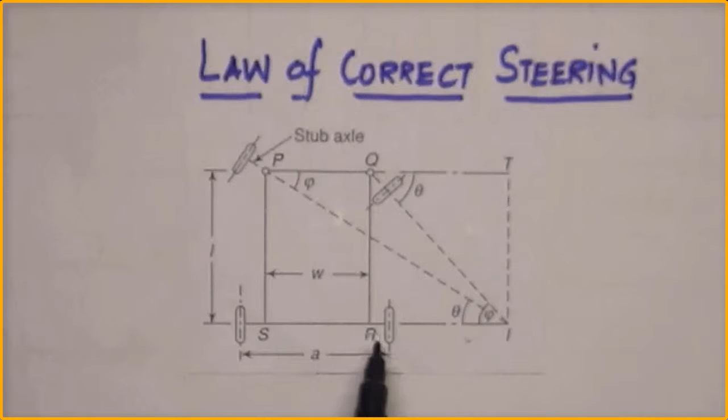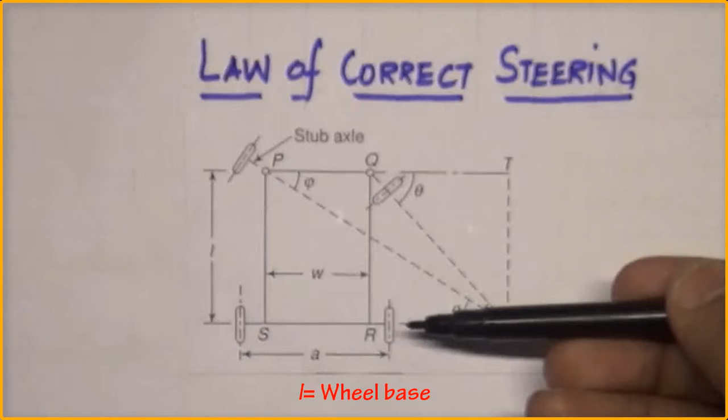Let's get used to the terminologies first. The distance between the two wheels, A, shown in the diagram, is called the width of the track. Similarly, the distance between the center of the rear wheel and the front wheel is denoted by the wheel base, which is L.

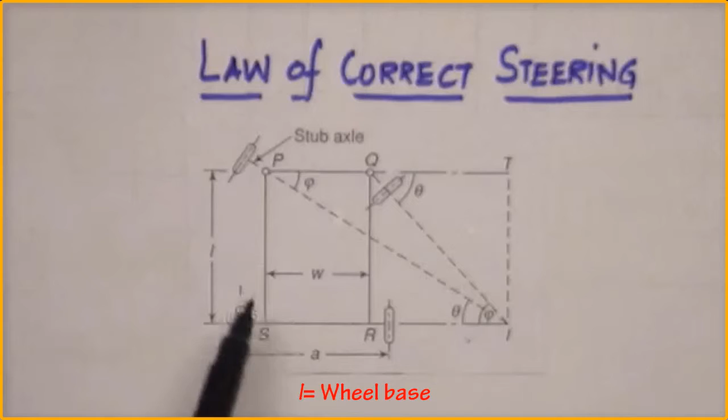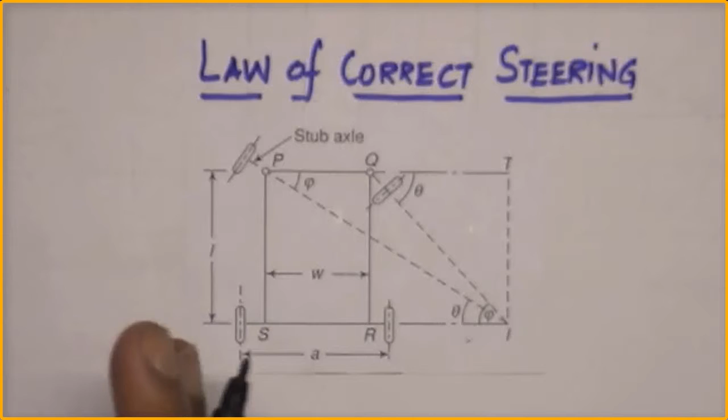Also, the actual width of the chassis is defined in this figure as W. Notice that width W of the chassis, A, the track width of the car, and L, the length of the chassis or the wheelbase, these are all constants. These are all fixed.

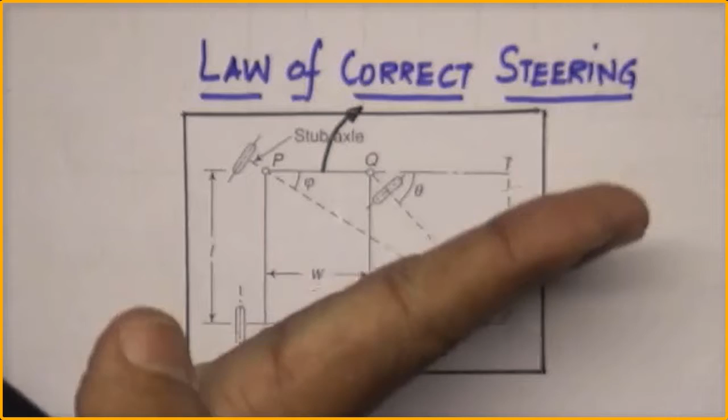Now, if while taking a turn, we want the vehicle to take a perfect right turn, in this case, which I would denote it this way. For the right turn, notice that the inner stub axle passing through Q and therefore the inner wheel will turn more at an angle theta with respect to the front axle PQ. At the same time, the outer wheel, which is P, connected by the stub axle passing through this wheel center, will rotate, but the angle of rotation phi will be slightly smaller than angle of rotation theta.

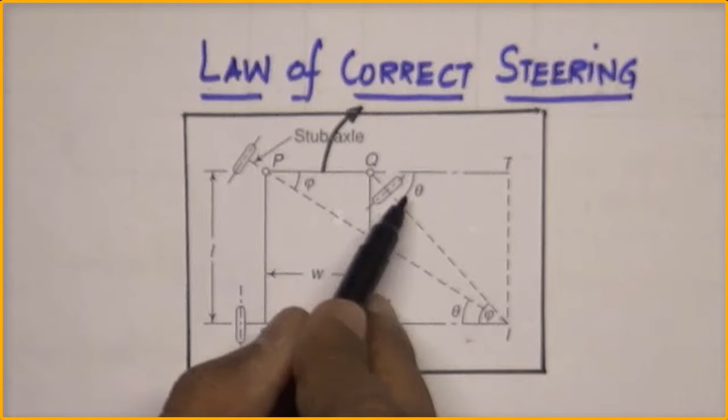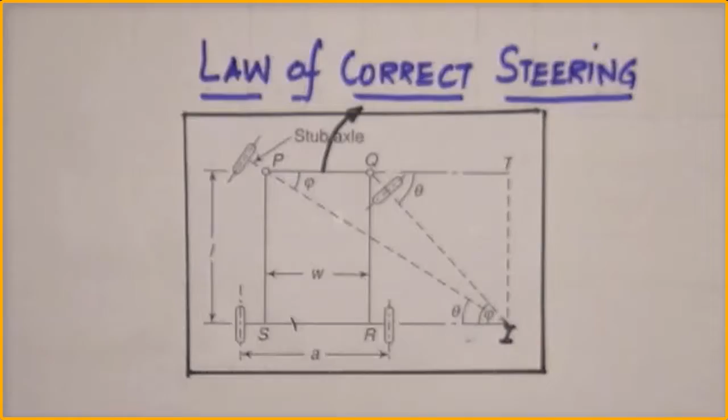Now, if you extend the lines passing through the two wheel centers, they will both intersect at this point, which we call the instantaneous center of rotation I. Also note that the instantaneous center lies on the line passing through the rear axle as seen previously. We are interested in getting a very simple relation between at what angle the inner wheel turned and at what angle the outer wheel turned.

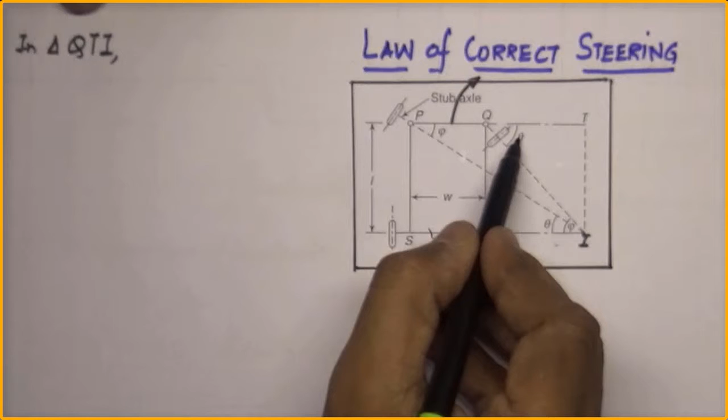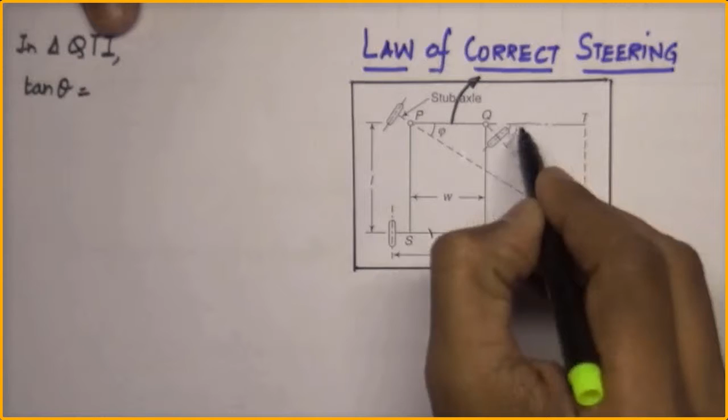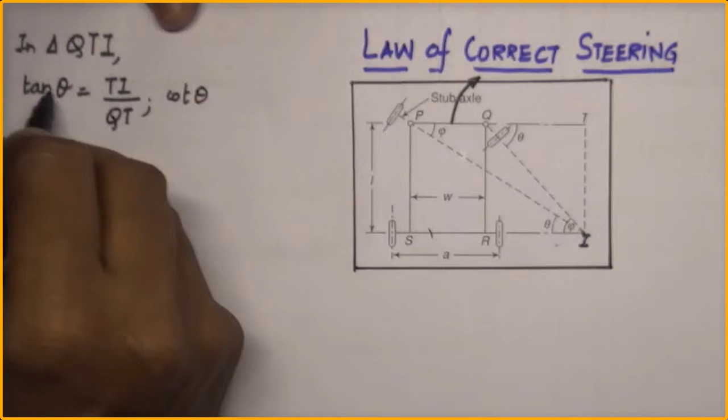Now, consider this right angle triangle ITQ. So in the triangle QTI, which is out here, we have an angle theta. If I consider tan of that angle theta, which is simply opposite side upon the adjacent side, we will get TI divided by QT. As far as the equation is concerned, it is actually easier if we rewrite this in a cot ratio rather than in the tan ratio. So therefore, the same tan theta, reciprocal of it, would look like QT divided by TI.

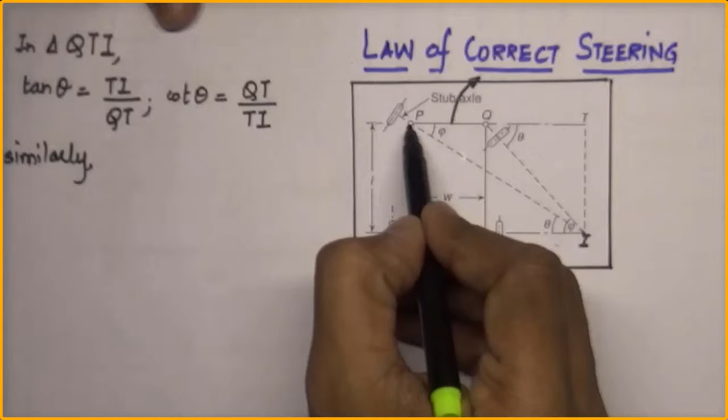Now, similarly, there's a bigger right angle triangle PTI, which involves the outer wheel. So in the triangle PTI, let's keep this separately. Again the same thing: if I consider tan of the angle phi here, it would be opposite side TI divided by the adjacent side PT. Same reasoning, if I consider the reciprocal of this, cot phi would look like PT divided by TI. Now, this is the geometry of your chassis or of the vehicle.

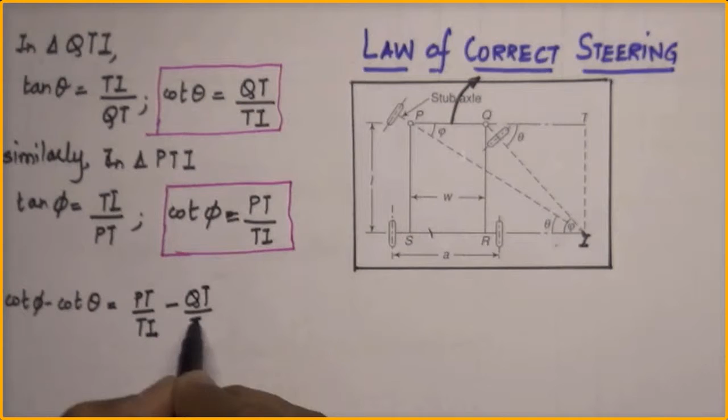Now, simply, randomly, consider the difference of cot phi and cot theta. Right now, you may not understand the reason why we have taken the difference, but if I subtract the left hand side from the right hand side, we get PT upon TI, the right hand side of cot phi, minus QT upon TI, the right hand side of cot theta. Now, the LCM of both these would be TI, and you would simply get PT minus QT.

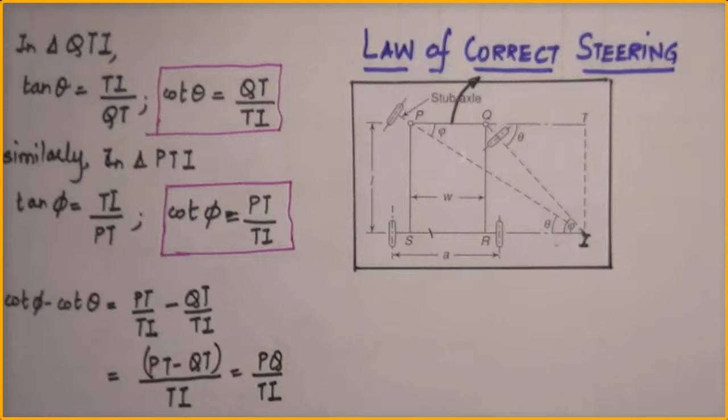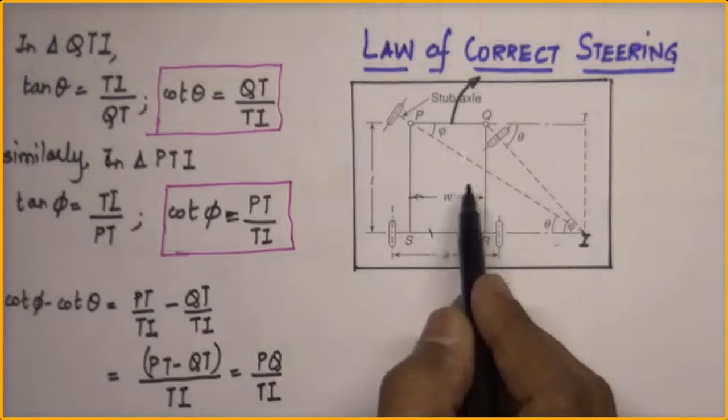Now, from the diagram, PT minus QT would leave you with only the chassis width W, that we can call PQ. The denominator TI, let us keep it as it is. So finally we get a ratio. Notice now that the chassis width PQ is fixed because the chassis is welded, so the numerator would be replaced by the chassis width W. Now the denominator TI, which we have made as an extension and a construction line here, would be exactly the same as either QR or the distance PS, which happens to be the distance between center to center when the vehicle is going straight. Now, this longitudinal distance is actually called the wheelbase, and the wheelbase is L.

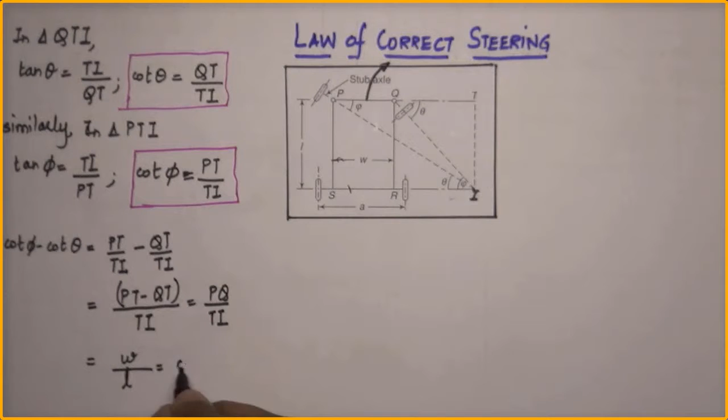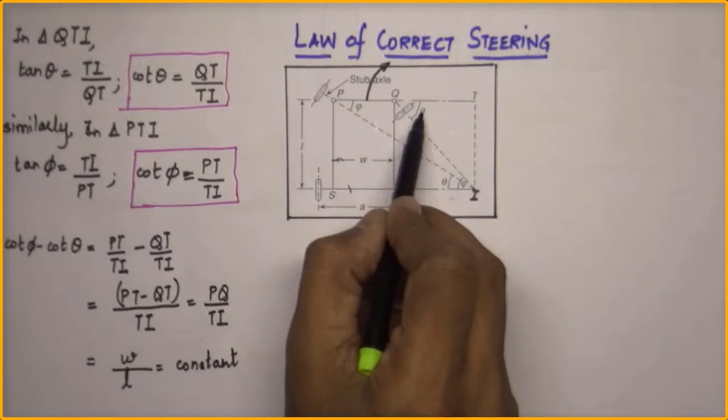Points to be noticed here: the width of the chassis and the wheelbase of a vehicle are all constant, and therefore we get a very nice relation between the angle turned by the outer wheel and the angle turned by the inner wheel, the ratio being cot phi minus cot theta equals W upon L. Notice here that the right hand side of this equation is a constant, and therefore the difference between the two is a non-zero number. This is very simple mathematics, and because the right hand side is non-zero, anybody can prove that these two are not equal to each other.

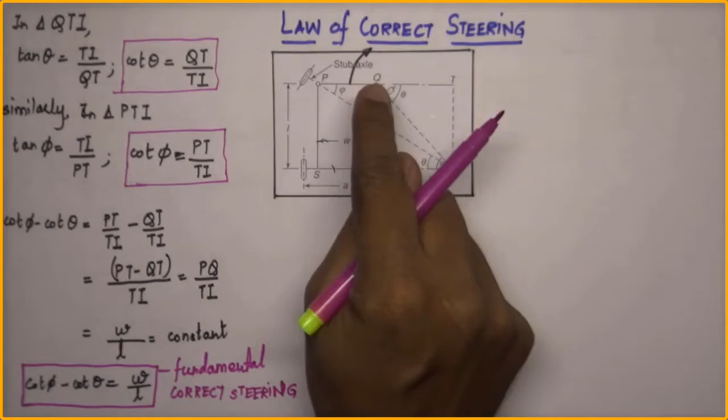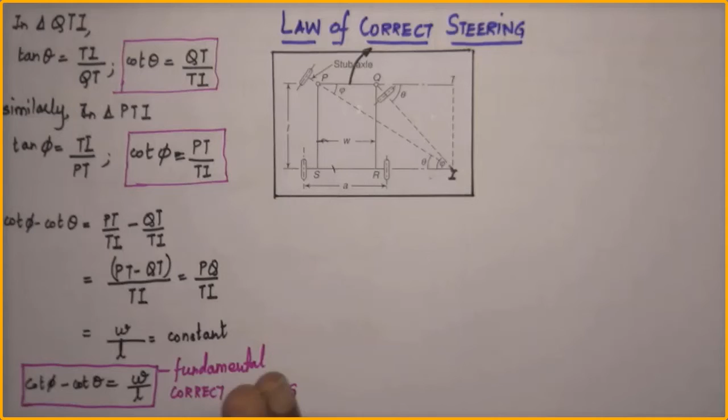This particular equation is called the fundamental equation of correct steering. So sometimes the word used is law of steering, or sometimes the word used is correct steering also. Now, if you make a mechanism for steering of a vehicle, and if that mechanism, whatever you make, satisfies this particular equation, we can call that mechanism a steering mechanism. This is where we would like to go into part 2 and discuss two different types of steering gear mechanisms. Thank you.